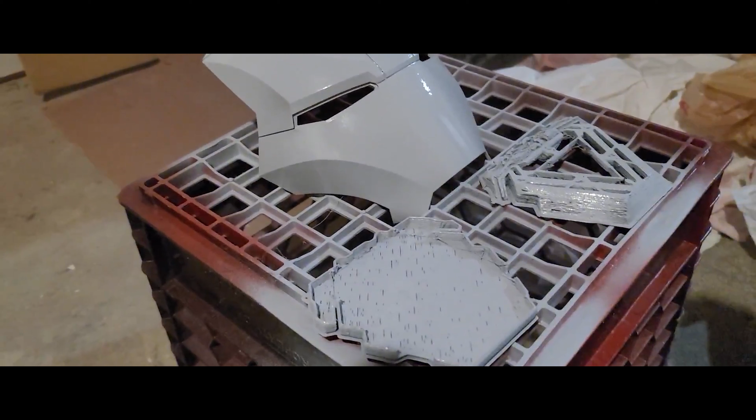Now don't worry, I am in a well-ventilated area. As I said, I have ventilation going outside, and I'm also wearing a respirator. These are aerosols - they're very toxic. You should do your best to protect yourself from the fumes, the particulates, all of that.

I also wanted to take a few seconds to point out a few things. If you notice, the faceplate is ridiculously smooth. This was printed by some of my buddies over at Additive America - I'll link their business down below. This was printed on an HP Multi Jet Fusion printer, and it was an amazing print.

Now beneath that, the actual focus of our project today is the arc reactor. This was printed on a large format FDM machine. It's an older machine, less used - I pretty much just keep up with some of the maintenance on it, and it's not particularly made for detail. I could fix that, but it works for most of what I'm doing, which is the Iron Man helmets.

And it will absolutely come up - if you notice, the surface quality on this print was garbage, absolute garbage. That's mostly my fault - I got sloppy and just kind of wanted to get it printed.

And it goes to a belief of mine that there's no failed prints when you're using thermoplastics, because I can always melt, sand, Bondo, filler primer like we're doing here. It makes it easier to work from perfect prints, but you're not always going to get a perfect print, and you shouldn't get disheartened. You'll see me finish a lot of really messed up prints.

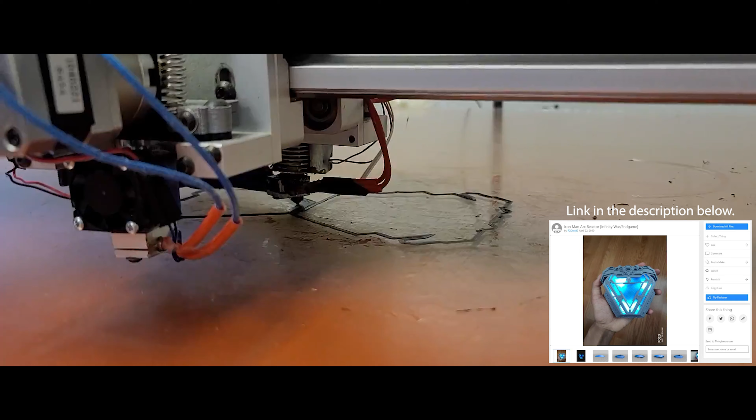So I got these files from a designer on Thingiverse named R2Droid2. To start, I only printed off 2 of the files because I thought I'd only use the top and bottom. So here we're going to print a template for the acrylic back panel as well as the electronics plate, which I'll get more into later.

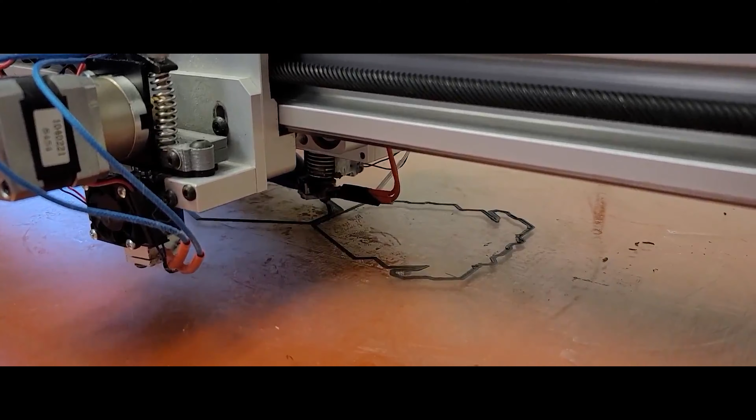So these are the parts I was working on yesterday. There were a few additional parts that I hadn't printed because I didn't think I was going to use them, but once I reviewed the makeup of this again, I decided that I would.

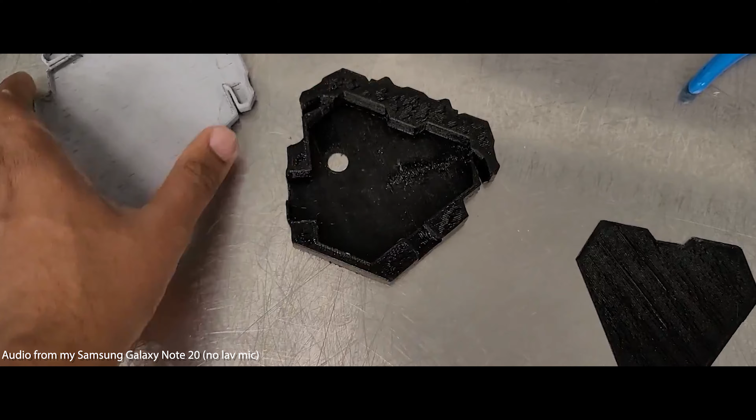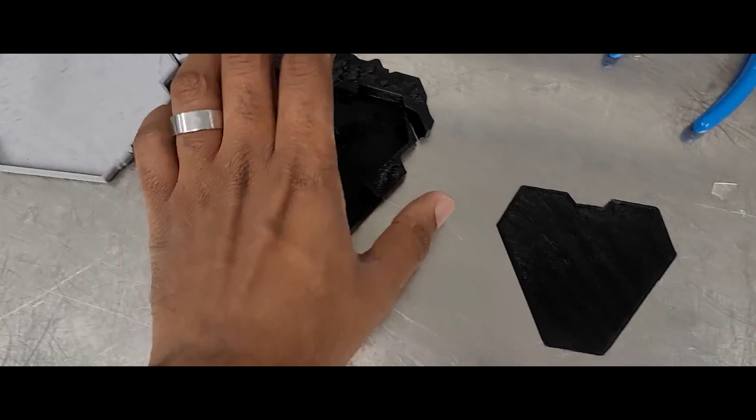So this is the plate that holds the electronics. Originally I was just going to have them behind the diffused piece of acrylic, but now I think I am going to use this. This plate sits on top of what I printed yesterday, and this is a template that I'm going to use to cut out the piece - I was going to cut it with the laser, and that part's going to go in there.

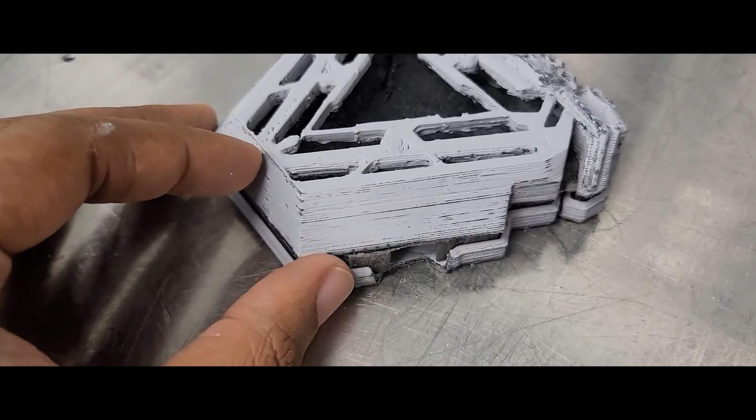There's a few spots. I'm not entirely sure what these spots were designed for. I might use them for strapping, or I might just fill them. Actually, now that I look at it, I might just fill it.

Now we're gonna jump over into Illustrator. This isn't a program I use very often. If I get more in depth than just the surface, you're gonna be able to call me on it. So we're just gonna keep it pretty superficial.

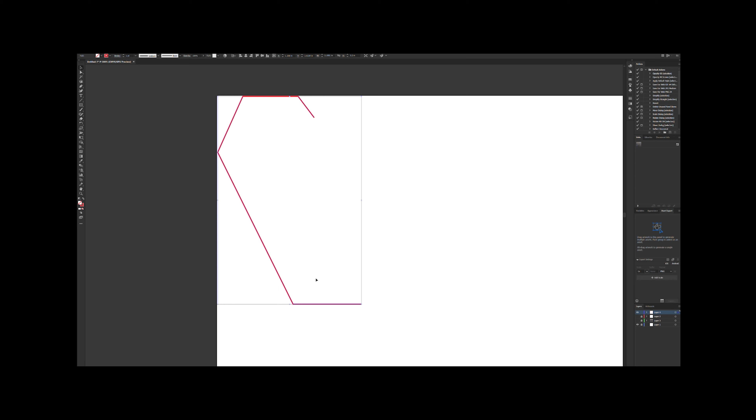I'm going to connect the edges, and then I'm going to reflect that over to the opposite side to make the full shape. I'll need this solid line in order to run the cut operation on the Glowforge. So we're going to do an edge, and then a cut from the sheet. I'm not going to do the cut from this broken piece, I'm just going to flip it around and use the good side. But here you just see me connecting those edges to make sure it's one uniform shape.

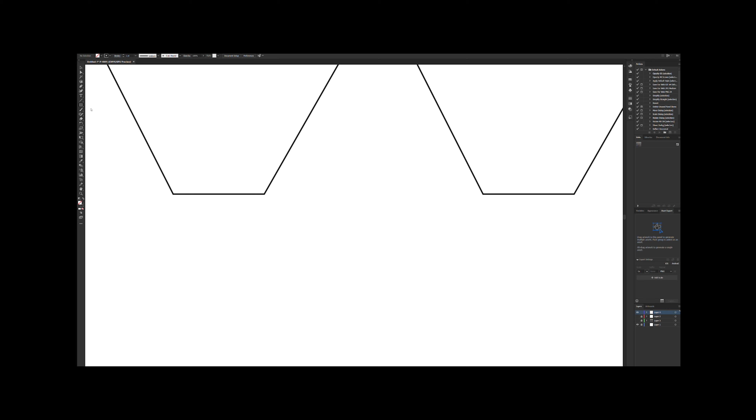Pretty simple. Next, I duplicate that over because I'm going to use that as the boundary box for this pattern that I'm going to make. If you know an easier way to do patterns like this in Illustrator, please drop that in the comments below.

I just kind of winged it. I probably could have did some sort of rotational pattern.

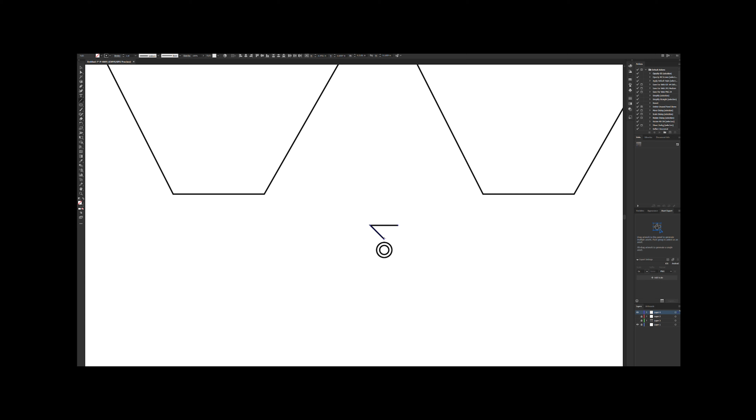In a future video, we're probably going to use a very similar technique to make lenses for the other Iron Man helmets. It's something I've been planning out this week. But for now, we're just going to go here.

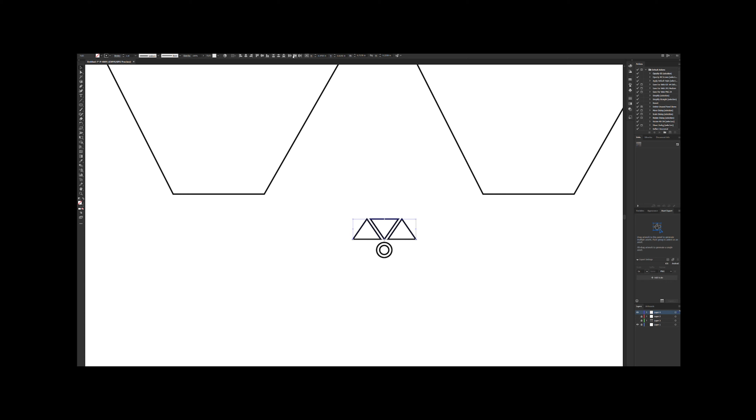Again, you see me just using Ctrl-J to connect those edges. I don't know what the MacBook shortcut would be. I'm really just going to do this by hand. I'm going to get them in about the right position, copy them, copy that group, reflect it down to the bottom.

I have in my mind the triangular tech pattern that I want to use, and between the distribute tools and just some hand adjustments, we're going to work it out.

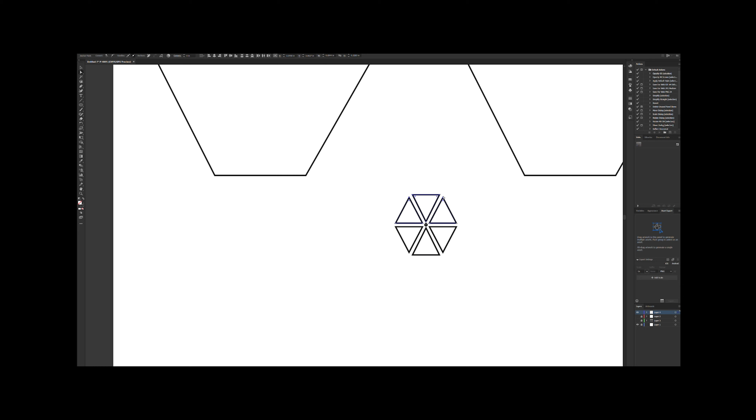Again, I am no Illustrator guru. If you know a better way to do the thing that I'm trying to accomplish here, please let me know in the comments so that I can share it with people. We can get that out there.

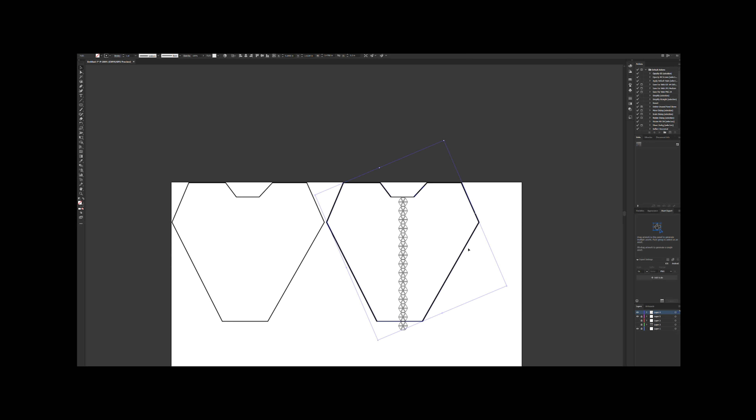What I ended up doing was I aligned all these parts, duplicated them several times, made a bunch of rows, and then I just duplicated it and moved it again. I'm pretty sure there should exist some sort of patterning tool where I fill a boundary box with this shape. We'll get there. Not in this video, but we will get there.

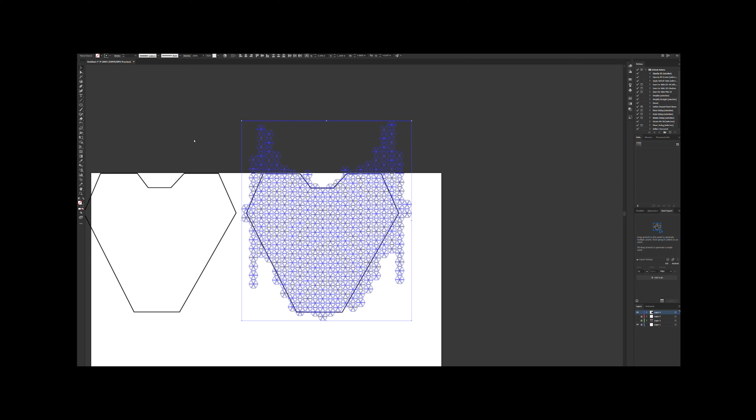In the end, how I ended up working it out was I did, I guess you can consider it a Boolean - I did a subtraction of the line from the pattern that I made. I tried a couple times until I got something I was satisfied with. I knew this was going to be the diffuser acrylic panel, so I was kind of okay with the way it came out. I could have put a little more effort into getting the pattern perfectly aligned with the boundary, but that's for next time.

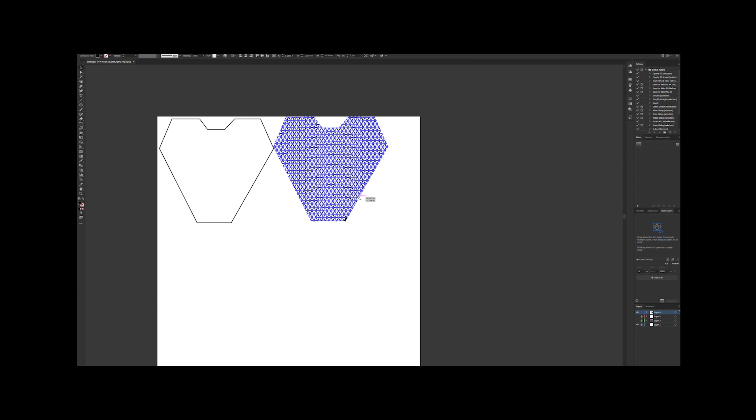The cut and the etch commands are powered by SVG files, so I ended up having to make two separate ones to input into the Glowforge - one to do this pattern etch and then follow it with a cut. You always want to do the cut last, because in the machine, if you do the cut first, the material drops from that initial housing and it might misalign the etch.

Before we set some stuff on fire with the laser, I just wanted to make sure everything fit. So from Illustrator, I printed out a 1:1 scale of the pattern that we just made, checked it against my 3D print, everything worked out, and cut it out very meticulously along the lines as they taught me in elementary school. Who am I kidding? I never learned how to color in the lines. But everything fit, so I was very optimistic at this point.

And then I noticed that I might actually be able to take this to also cut the lights. We will see. But we're going to take the electronics tray, check my sanding - yep, did a good job. We're going to drop this into our light housing template, and we're going to stick this backing on there just for illustration and hold it in there. If we do everything right, this is about what we're going to get at the end.

If I'm happy, you're happy. Let's go, let's take this to the laser and burn it.

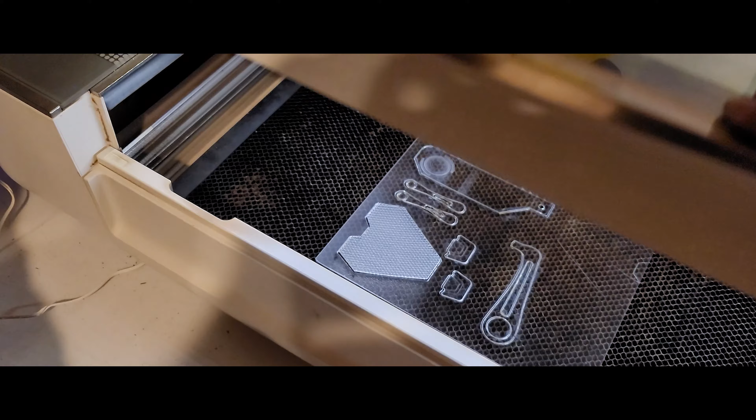Now, the Glowforge does some amazing work. If you notice on some of the smaller pieces, there was some burning from the laser. I could have dropped the intensity for the thinness of this material, but it came out immaculate.

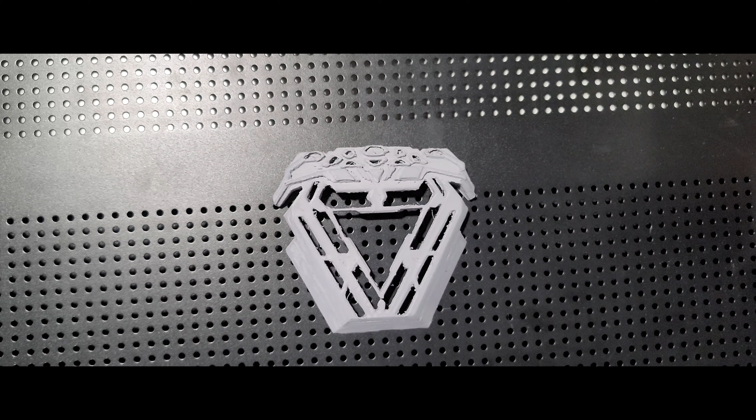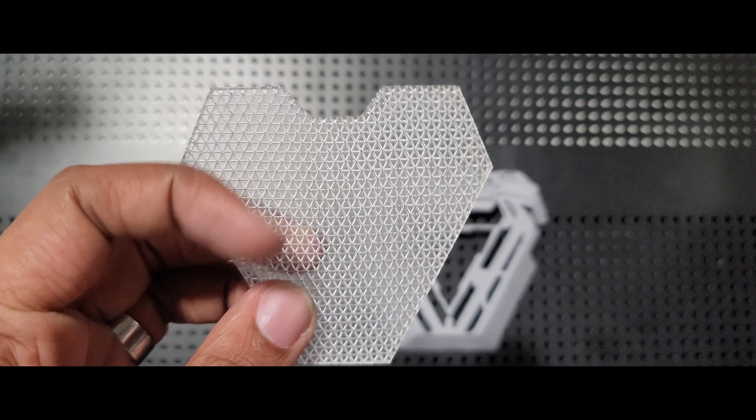At this point, everything's really starting to take shape. I've been cleaning up the print as we go. We have our laser cut acrylic backing, and this thing came out way better than I can imagine. Because of the heat, there was some slight bowing in it, but that'll be rectified once we put in the internals.

But again, look at this. Look at the way it etched this pattern. I couldn't be too much happier with this. And once we get everything together, it's really going to set it off. I mean, come on now.

Look at this thing. For reference, if I was not afraid of getting a takedown notice, we would definitely be blasting Kanye West, Can't Tell Me Nothing.

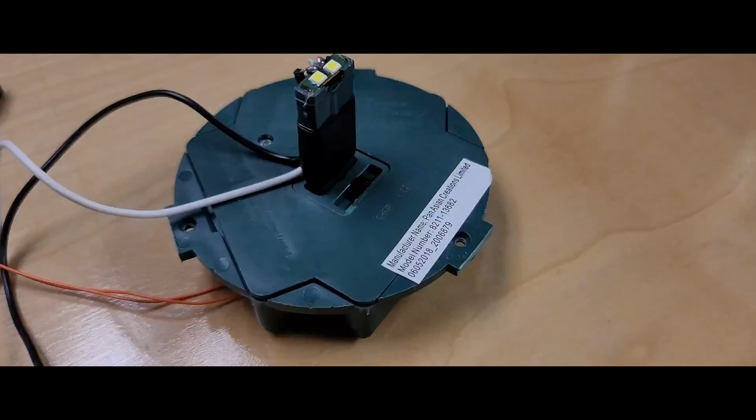So a friend of mine gave me a bunch of these little lights a while back, and I used one for an Iron Man gauntlet, and I had the other one laying around. But what I enjoy is it's a whole circuit with this nice little clicky switch button.

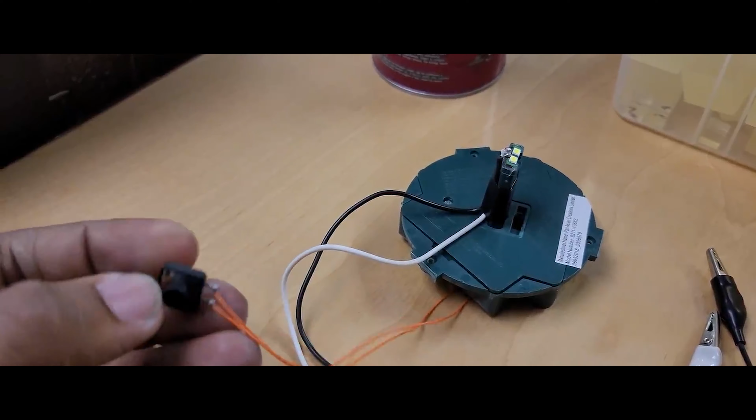We're going to repurpose some electronics, so let's see what we can do. To use these with our Adafruit components, we're going to need to make a little USB slot in the bottom of this plate.

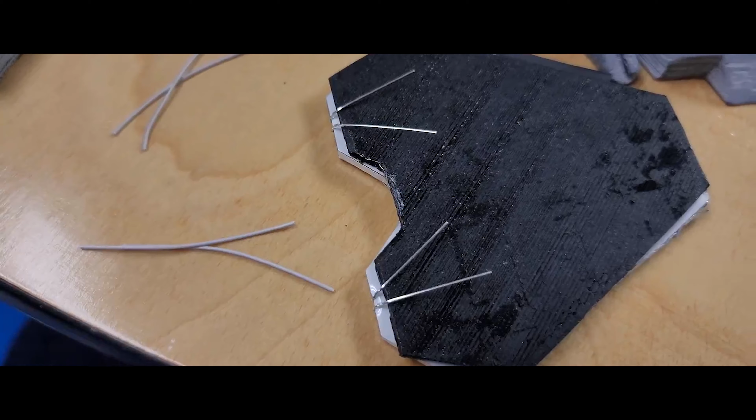And then off camera, I took my Dremel and I put a cutter bit in it, and I traced out a pattern onto those acrylic panels, and I ended up cutting out the shape that I needed to go into the housing. Also making sure that I remembered which contacts are positive and negative and how I'm going to run them.

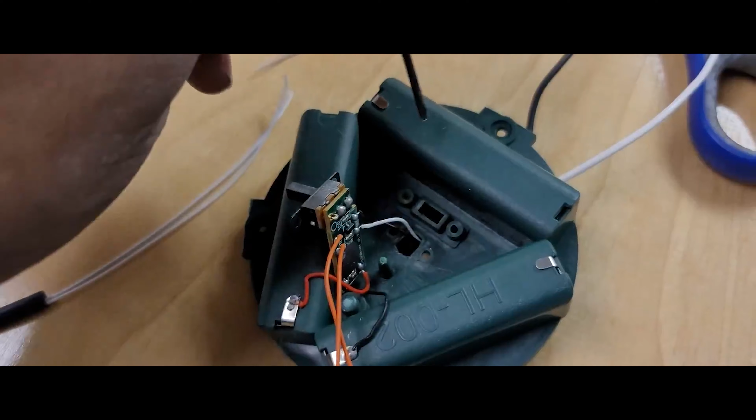Next up, I'm going to be taking this piece apart in order to utilize it, but first I'd like to take pictures or video to remember where exactly each particular part leads. That helps me reuse it later.

Now on an LED light, there's usually a long and a short lead, and this usually dictates the polarity. On mine, the longer leads were positive and the short ones were the negative. And this is important to remember as I start to wire these.

And here's where I might have went wrong. I decided to do these LEDs in parallel instead of series. And I'll do a longer video explaining the difference, but I was worried about doing them in series because if one failed, the circuit would fail. And it's a lesson I learned when I was building a Star-Lord helmet.

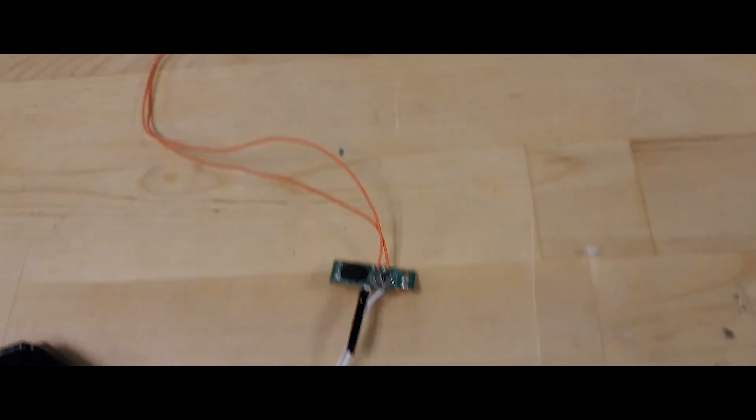So I got the hole just about the size I needed. I got the light cleaned up. I got the circuit and the switch just about transferred over. And I have my power boost, which will be used to recharge this entire system, li-poly battery and all. And it's a 2500 milliamp hour li-poly battery, so it should last a while.

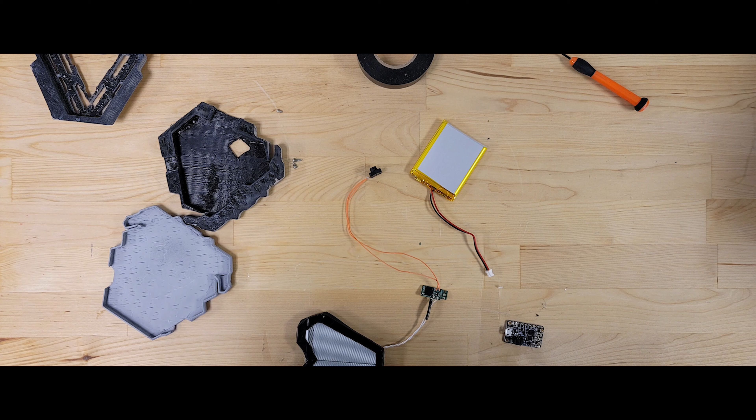And man, let me tell you, there's no better feeling than when the vision you had starts to come together and you have everything laid out, and then things go horribly wrong. We're gonna go back to my office and I'll illustrate the problem that has arisen.

It's nanotech. You like it?

So here's where I messed up. While cutting and testing everything and some of the electrical wiring, I shorted one of the LED panels. I did not put a resistor in that circuit and I messed up. It looks gorgeous though, but I messed up.

Back to the drawing board.

So as I was leaving to go back to the office, my wife sent me my honey-do list, and part of it was to stop at Walmart. Now, while in Walmart, I found this circular LED light. It was in the clearance section for like $1, and I immediately knew I have an idea.

I won't bore you with too much of this, but here was my thought process. I found this LED light for $1. It had a circular pattern, which I really enjoyed with the acrylic panels I'd gotten, and even if I couldn't get the LED use out of them, I still had these nice, already cut acrylic pieces. I had hot glued it to the backing plate and lined it with silver tape, and I realized I was going to have to undo all that, so I did.

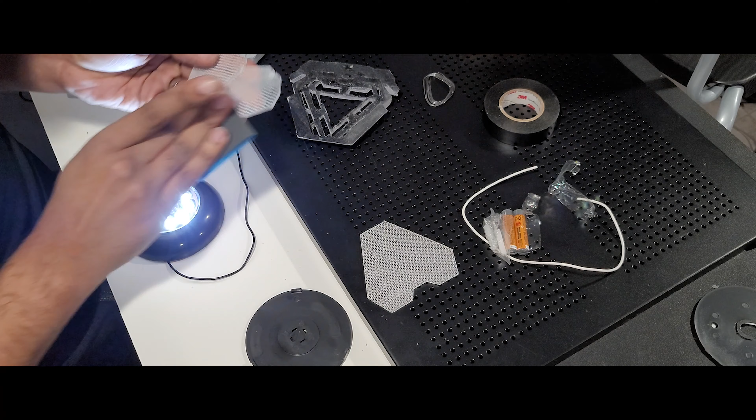What I decided to do was sand it a little bit in order to see how well it diffused the light after sanding. It didn't really increase it as much as I wanted to. I contemplated taking it back to the laser and just sanding and polishing it back clear, then using the laser to re-etch that pattern I did in the first acrylic, but I just thought that was too much.

And now we get to my absolute favorite part of most of this, and it's stripping out some components. This little LED light came with a reflector ring and its own little clear acrylic diffuser. It worked out pretty well, and I actually thought about including all of that inside, but the more I looked at the components, the more I realized it was going to be way too bulky for what I had put together.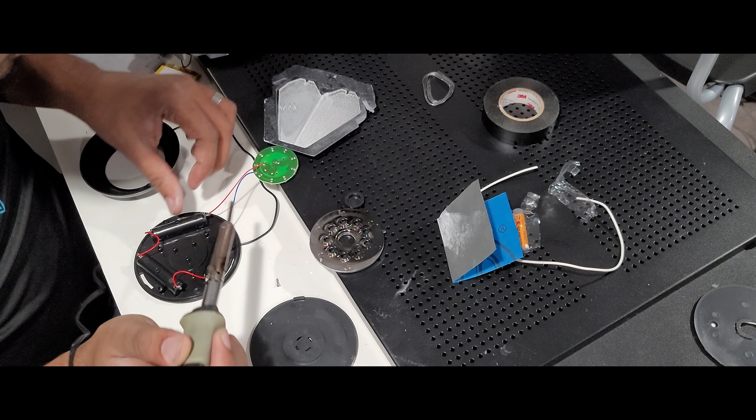So here I'm just going to take the positive and negative leads. I always try to mark my leads when doing things like this so I don't forget later, because that's particularly dangerous in some instances, especially if you're using non-controlled LED lights - these just need power, they don't need any sort of code. I also started to realize here that the acrylic diffuser plate was going to infringe on this new design I was working out in my head, because at this point we're off the rails, guys. We're making it up as we go along.

I'm going to try not to bore you with too many details, but here I'm just taking apart that assembly we got and fitting it into the enclosure that we printed and sanded. Nothing spectacular, it's mostly a balance of what I want to go where and how I want it to function at the end.

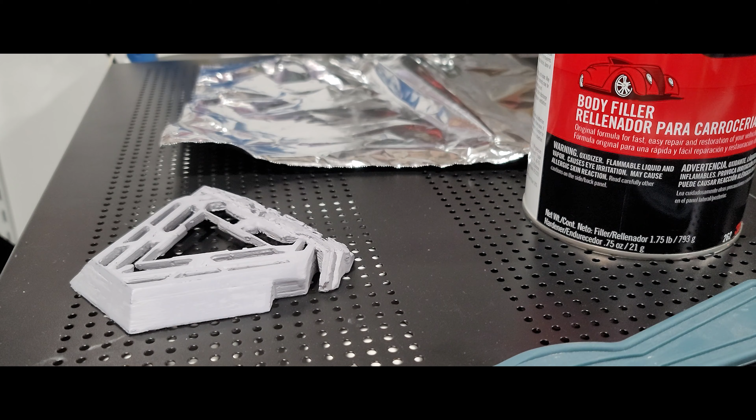Okay, so here's the skinny. I'm going to do some more surface work to the outside casing of this. We're going to get it all nice and polished up, get the edges all nice and crisp, and we're going to work out that gap. I have a buddy - I might get some engineering grade rubber gasket from him. We used some for a project at work, we might still have some. If so, I really think that'll help with this project.